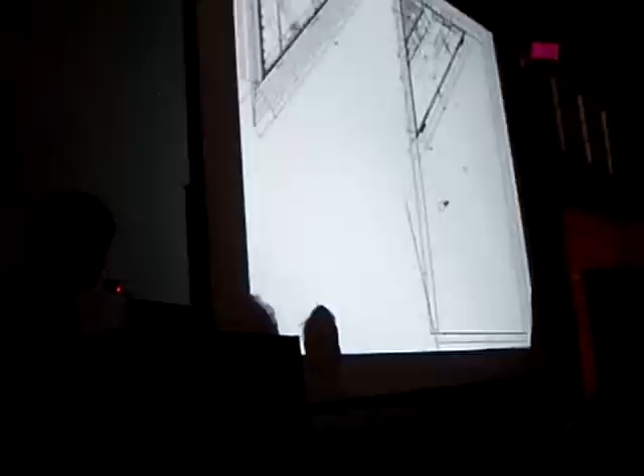So this is a plan of the pony garden. We set firstly the paddock for pony, and we borrowed this corner from pony to let people live in.

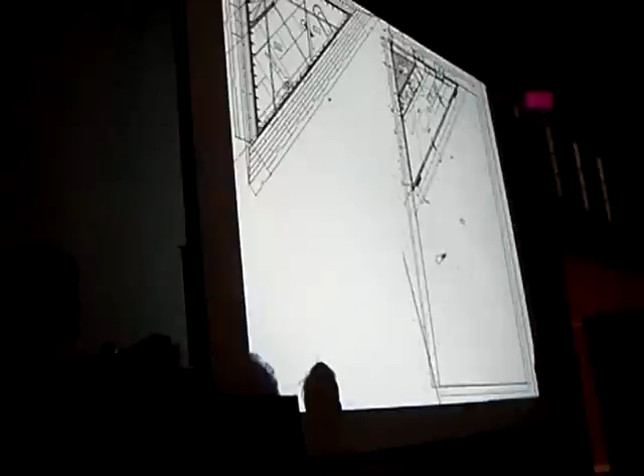And I always said to her that you can't have a glass window because it's expensive. You don't have enough money to make it. So you have only wooden shutter, and your living space is totally open to outside. And she said, yes, it's okay.

And so this ground floor level is loggia, it's exterior space. And you walk up and you go to the attic space, it is interior. So when it is extremely cold, they can escape into attic space. And then you can dine with pony, or you can feed pony from inside of the house.

So it is like this. And so the floor there is floor heating, and so you can also live in winter in this house, in this condition.

And this is a view. Oh, there are two heads. Huh?

Okay, thank you. This is the attic space. So this is a window to watch down the room for pony, where pony is living there.

Then I'd like to show one of the research projects we've done in my laboratory. It's about windows. It was published as a book titled Windowscape. It's a collection of many different types of windows from all over the world. We traveled 125 cities in 3 years with students in my school, Tokyo Tech. And we did the measurement and sketch and took photograph and made interviews to the inhabitants.

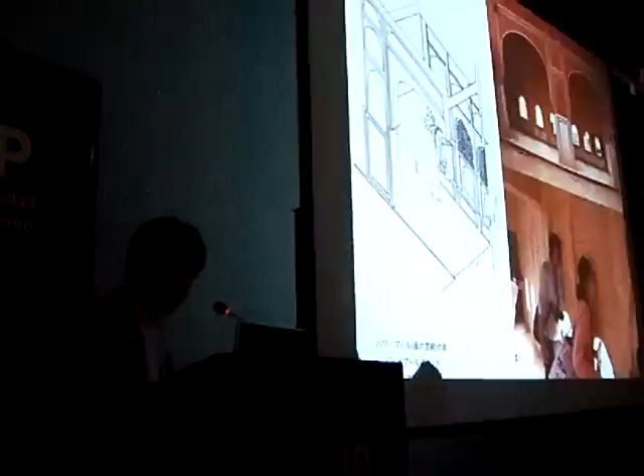Window is the most important, I think the best, it's gathering so many different types of behavior in the building. It's gather light and wind and people to behave. So if you want to see the behavior in the building, it's better to focus on window. So we did the comparative, we did the typology, and we found several concepts from these examples.

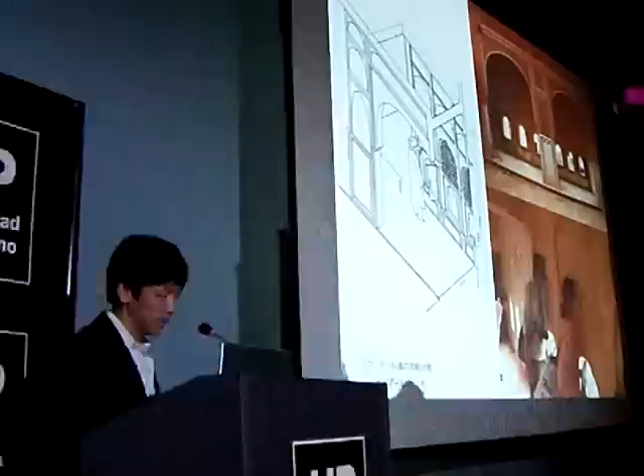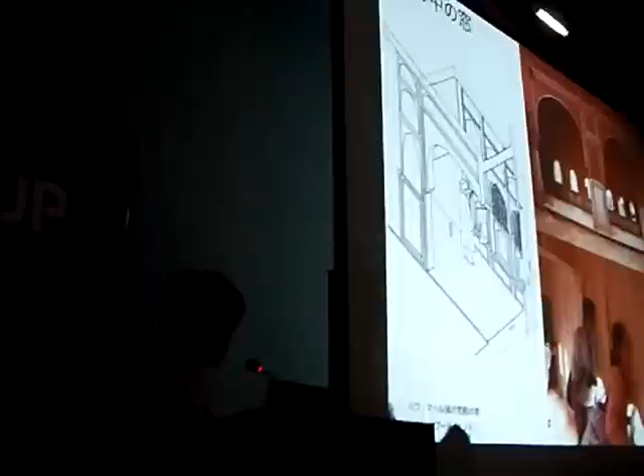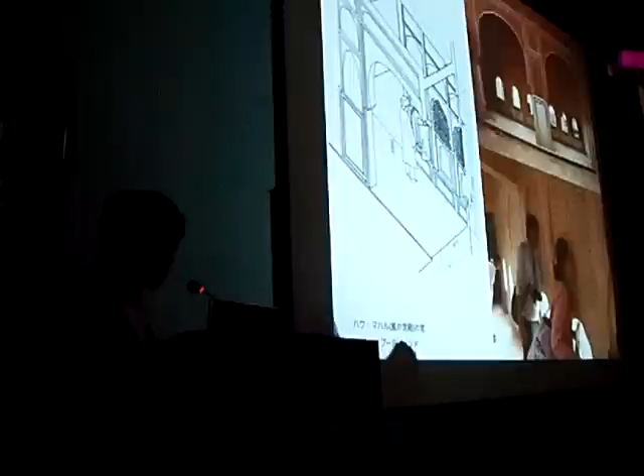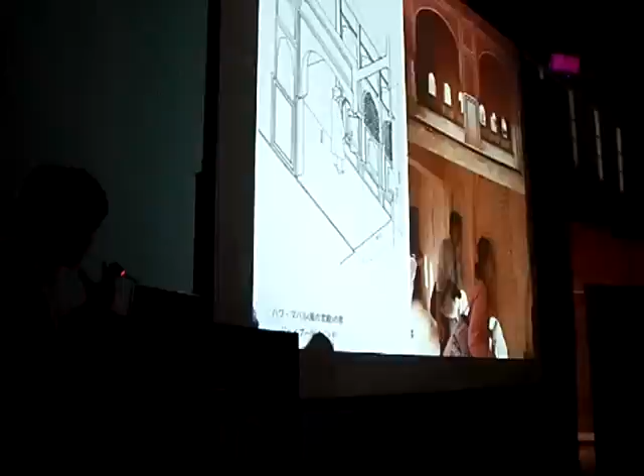This is a window from India. We call it window in the wind. So this stone filter, stone screen, carved by hand. It's 7 centimeters width. It creates a very nice breeze by itself because of its profile. So the hot air goes through this short section of the stone, and it comes through the shadow in the stone, and then it became a little bit cooler than the outside air. So it's a kind of self-generating ventilation system.

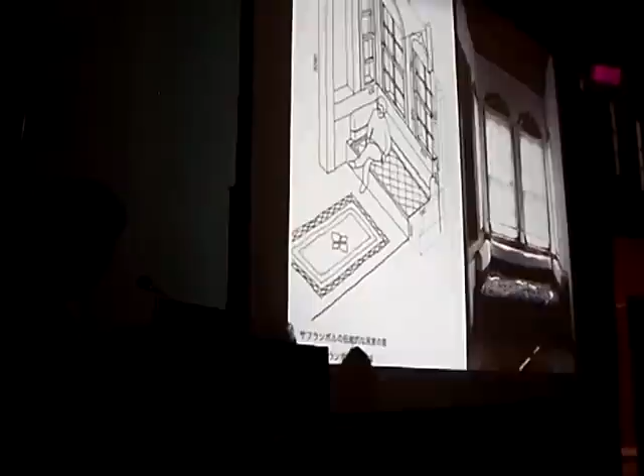And this is a seating window. It's from Turkey. In Turkey, people push out the window and install sofa and sit on it in the atmosphere of the light from the window.

This is another window which is for sitting, but also for working, in Safranbolu. You can see this type of very open window, which is part of the life of surfer. And I like this example because it totally utilizes all the space of the width of the shop by meaningful elements. So she's working on the windowsill, and it creates a kind of sitting space which bridges inside and outside.

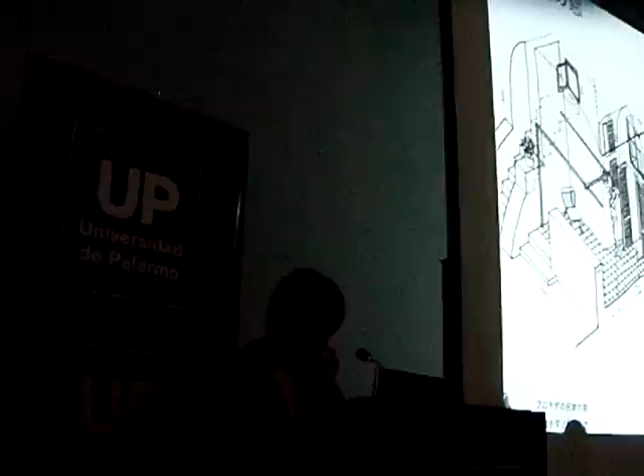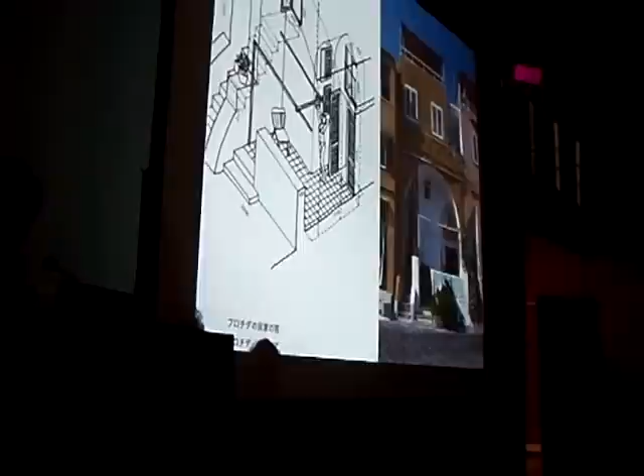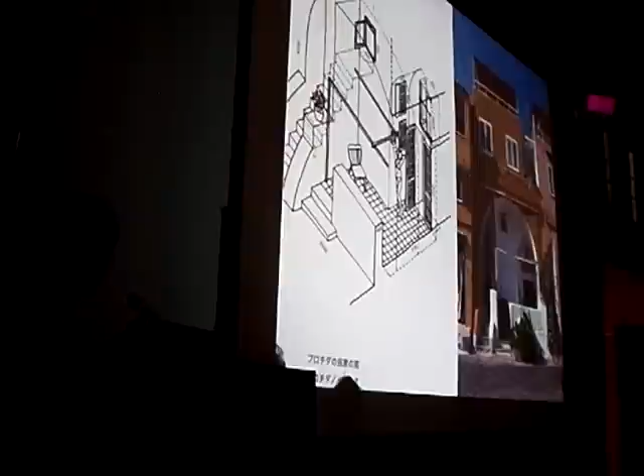This is window in the window. This is from Procida in Italy. It's a house for fishermen, and this facade is facing to the ocean. So fishermen can recognize this big opening also from the ocean on the boat. And then another type of window which fits to the life are integrated within this window. So 2 different types of windows, one for long distance to the fishermen on the ocean, and the other window, small window which fits to the life, are integrated in one facade.

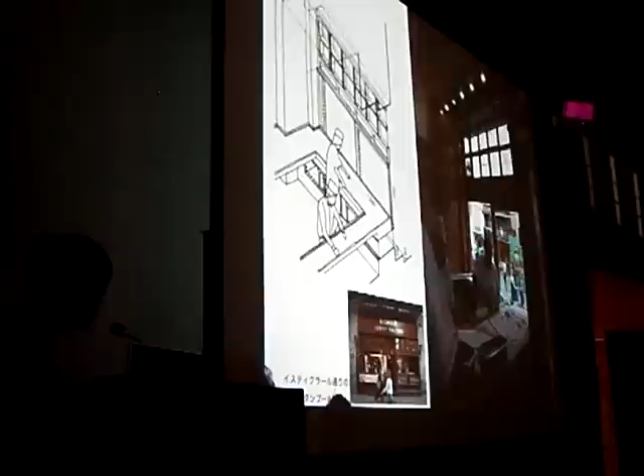This is working window from Istanbul. The window becomes working place where people can see the freshness of the products. And window also repeats itself along the street and creates a streetscape.

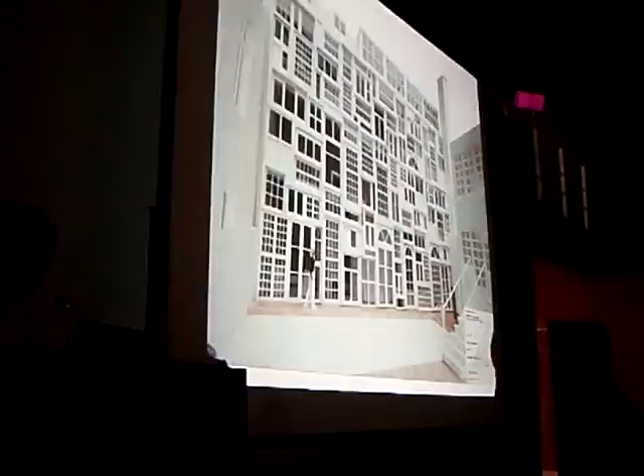And one reflection of this type of investigation is this project, a hotel in Amsterdam. Only this facade was newly designed because it is facing to the courtyard, and it's a collection of genealogy of windows in Amsterdam. So we have 4 different generations of windows in one facade to make a kind of more intimate feeling to the hotel space.

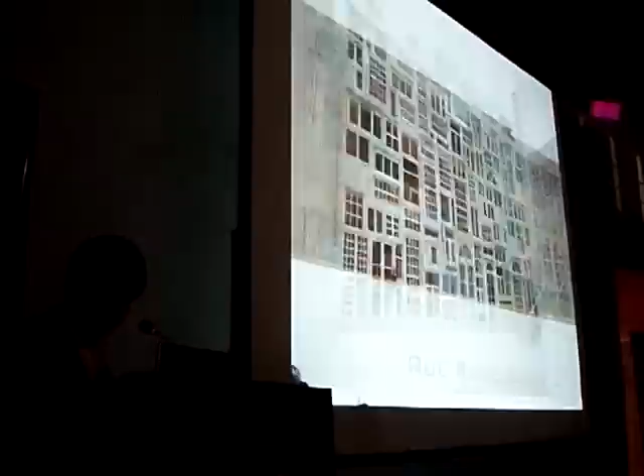And another reflection is in this project, Rebière. This is social housing in Paris, in the 17th arrondissement. I like very much the repetition of French windows in Paris because it has redundancy rather than flexibility. You can say, I'm living with this window, but you can also say, probably I'm living in these 2 windows and this big window.

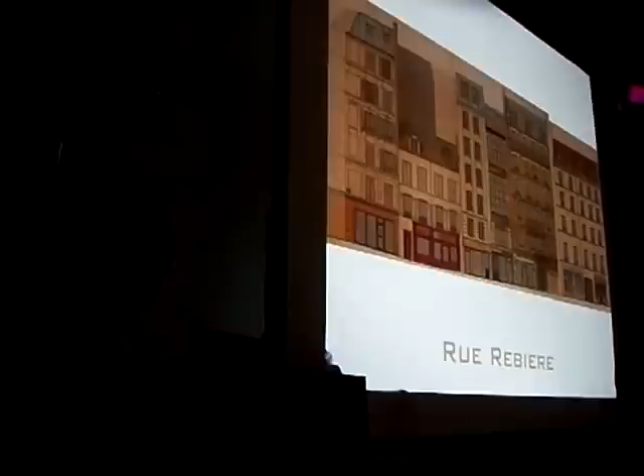Or you can say I'm occupying 4 windows, or I have 8 small windows. So the interior coordination, the spatial organization is totally detached from the repetition of the window which is on the facade.

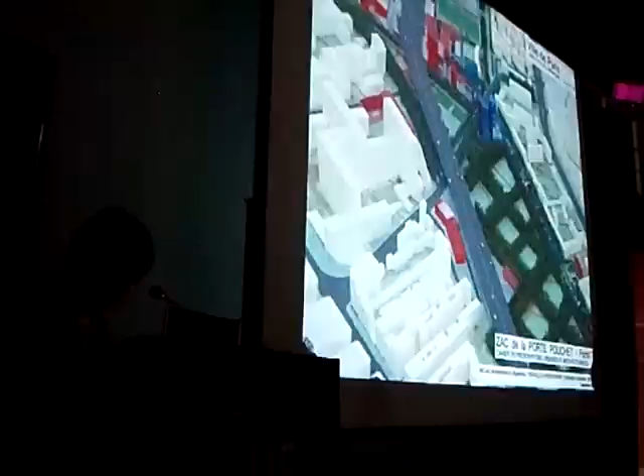And the project is happening along this cemetery, the periphery of Paris. This is Cimetière de Batignolles, and there is a 24 meters wide, 500 meters long street which was almost depopulated. There is no intersection, no cafe, no shops.

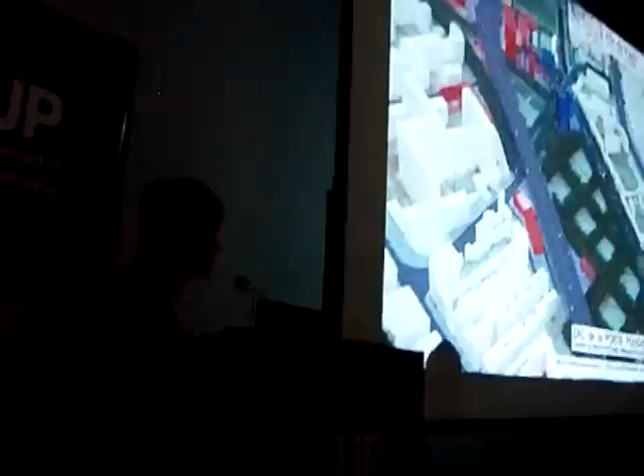And it's part of the reorganization of Porte Pouchet, which is not well known even among Parisians. So the city government wants to reorganize Porte Pouchet as a new sub-center. One of the towers, built in the 60s for social housing, is going to be demolished.

It has 140 housing units, so the government has to replace these 140 houses with new buildings. They found this long street interesting because it's too wide for no traffic. So they divided this street into two, 12 meters in depth but 500 meters long, and invited 7 architects, 5 from France, 1 from Japan and 1 from Switzerland, to design together the street of social housing. This is a view of the street next to the cemetery, with a beautiful alley of platane trees.

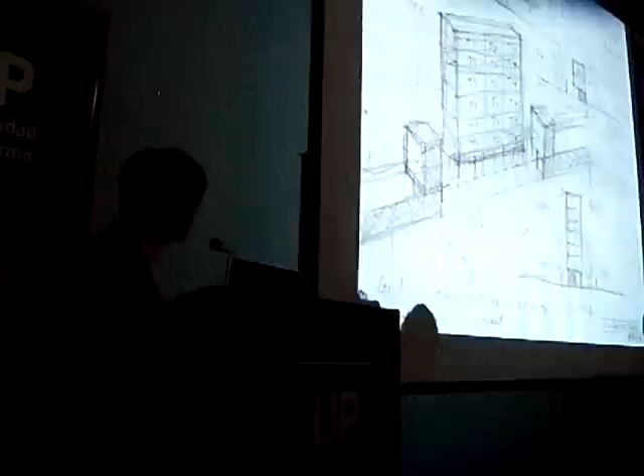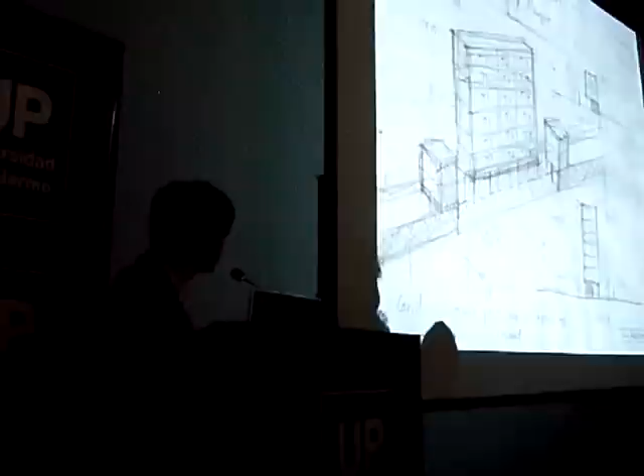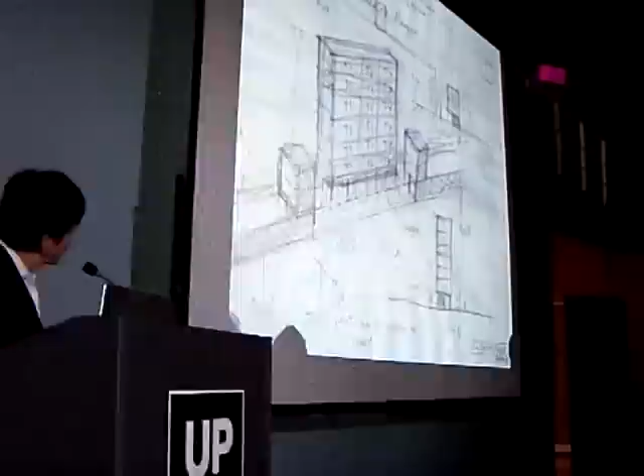Our final design is based on this sketch. We had to make 20 housing units in one property - this was the obligation, the requirement from the clients. So we made this very compact slab-like volume, setting back from the main street, creating an open space in front of it, and also creating a gap space between the next buildings.

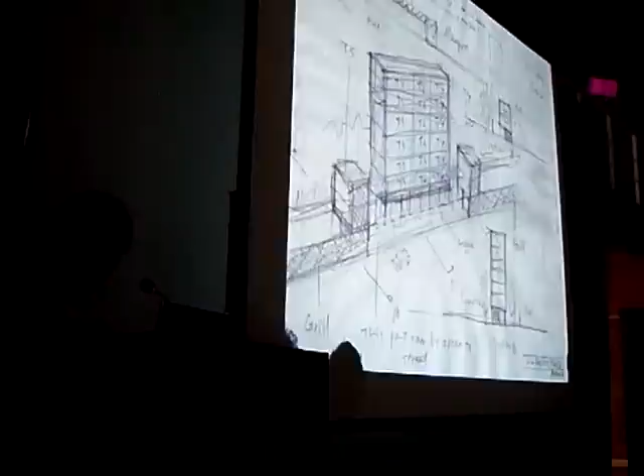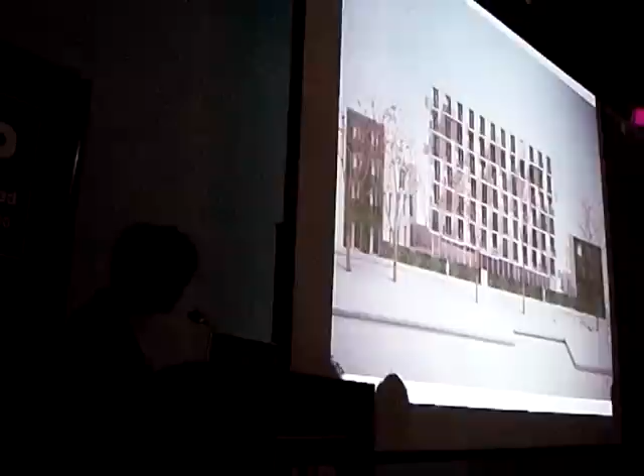And we inserted 2 small houses, almost like detached houses, into this series of social housing. This gives a variety of volume and ways of living. We found it's a very interesting strategy. This is a model - the main body of the housing is here, but we also have tiny volumes.

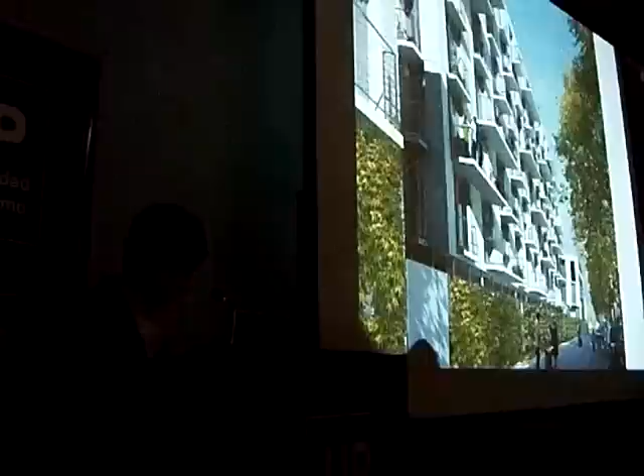We were obliged to put a fence along the street, so we tried to enlarge it on the facade of these tiny buildings to create a vertical garden. This rendering shows the repetition of the French windows and also the repetition of different sized balconies, which mystifies the unit of the family. So from outside, you can't see the family unit, which is always obvious in modern housing.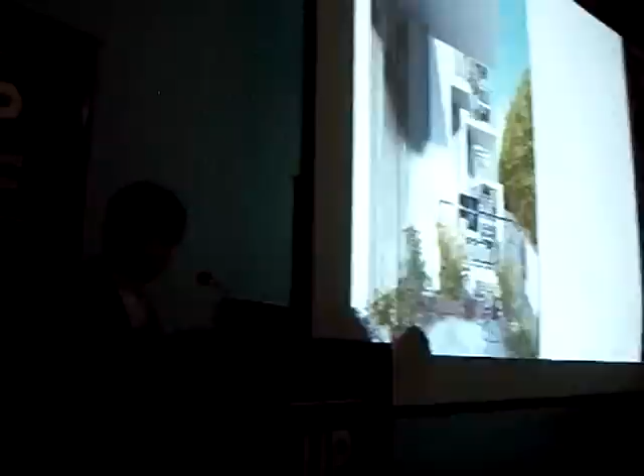So this is a view between balcony and balcony. We call it vertical neighborhood, so you can communicate with neighbors without going out from your house. And this is the result - it's built like this. We don't have green on the fence at this moment.

This is a very simple repetition of French windows. There are 108 windows for 18 houses, and you don't know how many windows one family owns from outside. We also have this type of loggia space on the ground level for the community, facing the open space for children's playground.

This is some detail of the balcony. This is the backside facade from the cemetery. It was difficult to make big openings to the facade because of the restrictions about windows in France, so this is called the loggia.

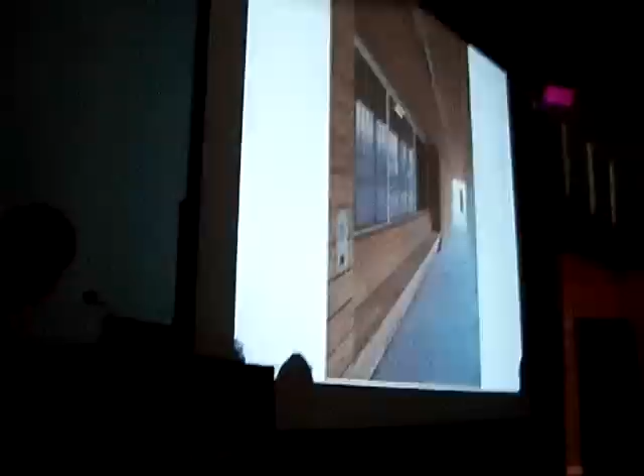We insisted on having a bench next to the entrance in this loggia space. We fought with the clients, but finally we won. We got it.

So the interior is very Haussmannian - simple rooms with repetition of French windows. This is one of the corners, you can see Sacré-Cœur. This is one tiny one, but with 5 windows. And here's another corner.

This is the relationship between the living room and kitchen. The interior space is very much standardized, so we concentrated on making very nice rooms, like nice bread. This is the vertical neighborhood - you see different types of balconies from different windows, so you can communicate with neighbors.

I'd like to go on to show some projects on a smaller scale, more about public space. And this is...

White Limousine Yatai, realized in the framework of an art exhibition. We were asked to connect different art venues in this big art triennial happening in the landscape of the whole region. We proposed this yatai, which is a food store in Japan. This is the normal size of the yatai, a food store in Tokyo.

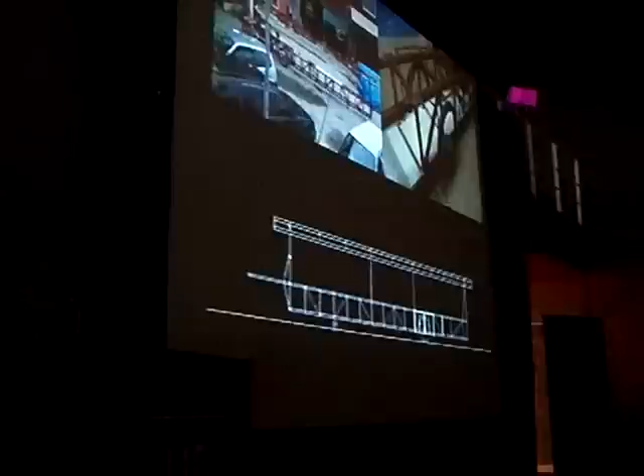Like a limousine car. So this is a model, and we made this building with steel beam, truss beam with wheels. There is no motor, so you have to push. And since it's 10 meters long, it always produces a traffic jam.

It's very troublesome, but people start laughing when they recognize it as a stretched food store. And we visited different venues and participated in local festivals like this. This is one of the things we participated in, a local festival, and people know how to behave in this type of space.

So they are joking with the students who worked with us, but we serve only white meals and transparent green meals, which reminds of the very heavy snow in this area. So at night, many people gather to start singing, and we are always criticized by neighbors.

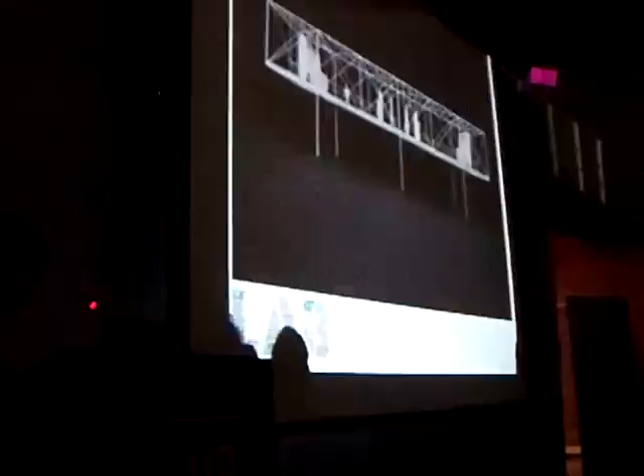We call this type of work micro public space. By introducing this type of furniture or mobile structure, we stimulate the public space, the sense and practice of public space, which is incorporated in every human being. So we call this micro public space, or public space without an enclosure.

It is not the space which is defined by enclosure, but which is defined by the collectivity of collective behaviors among people. And we developed this type of work, dozens of projects in different places in the world.

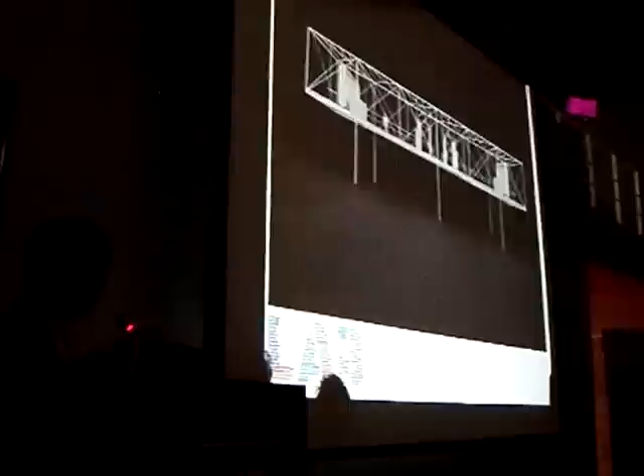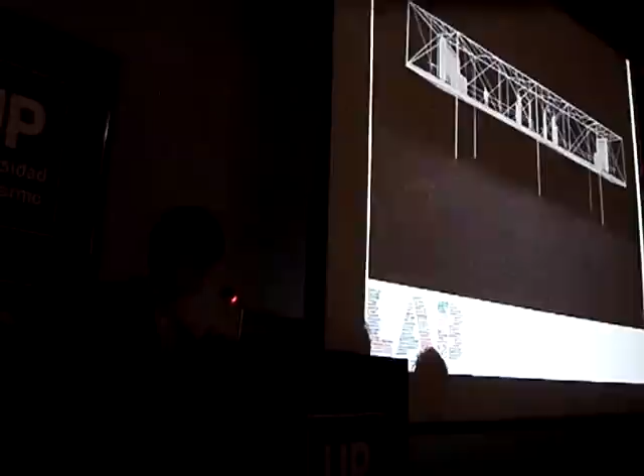And then recently we had another opportunity to design the BMW Guggenheim Lab in New York, which is a development of our idea of micro public space. Micro public space is totally dependent on time, so it's a time-based performance space.

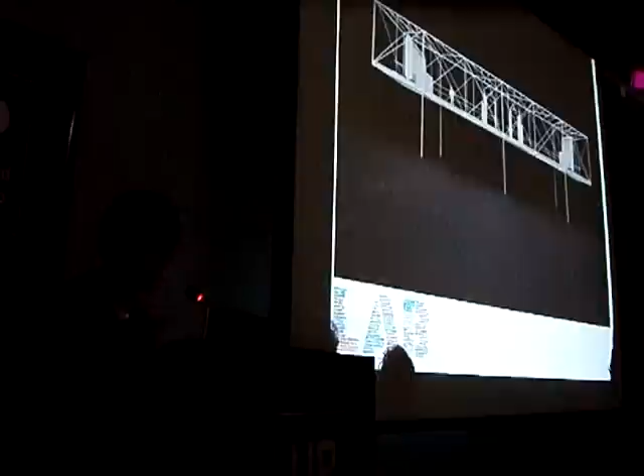And in this project we also developed this idea by introducing this type of structure in the city. So we always imagine the city loggia, which is very typical in Mediterranean countries, and which is very generous for people, and there's no fixed function.

You can do a wedding, you can do a juridic meeting, you can just come alone to enjoy the landscape from the window. So this is totally open space for the community. We like to introduce this type of space in the framework of today's city, used in the framework of the BMW Guggenheim Lab.

BMW Guggenheim Lab is a kind of traveling urban think tank which thinks about urban issues in different cities. Now it's traveling to Berlin, and after Berlin it goes to Mumbai. So the structure is a traveling structure, so it must be collapsible and easily buildable.

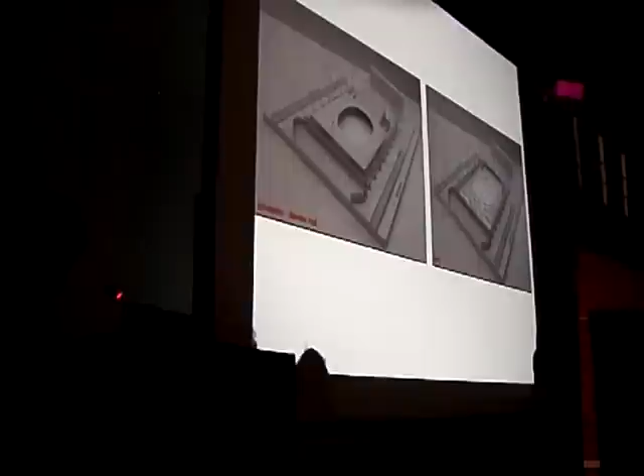But we couldn't find it, so this is an initial scheme which we proposed, imagining the loggia in the city with a big courtyard, but actually we couldn't find the appropriate venue which fits the idea of the curators. Finally we found this site, which is in between buildings, a kind of leftover space in the city, but this site was interesting because it connects two streets.

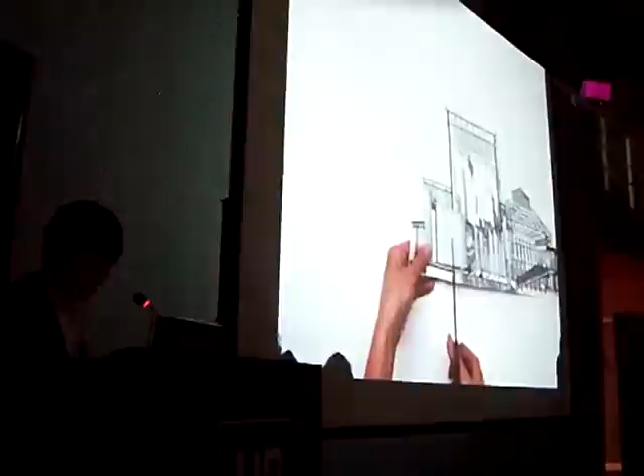One is Houston Street, which is here, and another is First Street, this side. And they have a community garden behind these buildings. So it could be a new proposal also for the renovation of this community garden. So we worked together with local people.

But in order to put all the supposed activity in this space, which is 1/3 of the expected surface, it has only 170. So in order to do that, we proposed to the curators to think about theater rather than an art exhibition space. So we proposed they think about this urban lab, Guggenheim Lab, as a 10-week long lasting theater play.

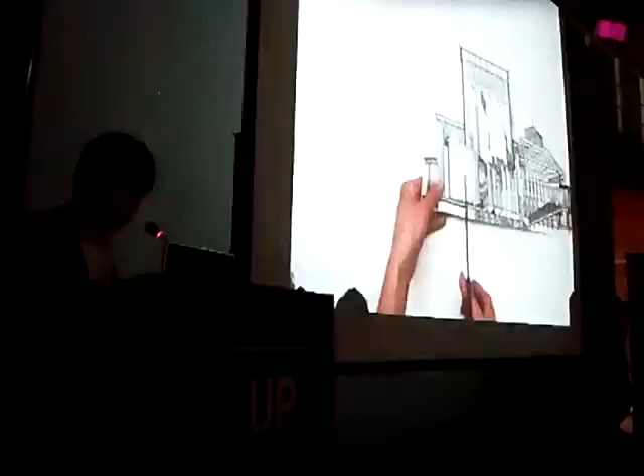And they are happy with this idea, and we proposed this traveling fly loft in different cities. So we cut out the stage and insert it into the vacant space in the city. So it's only the fly loft, which is the space above the stage.

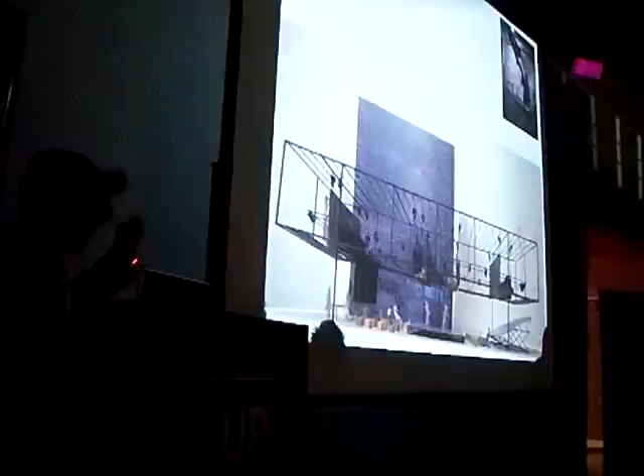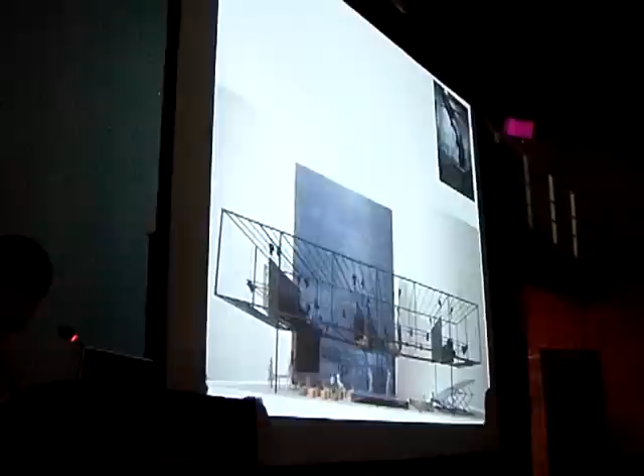Which has housed so many instruments like lighting and screens and beamers, projectors, and audio systems, and storage of furniture and big stage steps. And we made this structure with CFRP, carbon fiber reinforced plastic, which is extremely light and strong. It's 1/6 of the weight with the same performance as steel.

So the program became totally up to the time schedule. Curators started to make a time schedule to change the ground level by bringing many different types of instruments down from the upper level and transforming the stage on the ground level. This is the program they made, following the timeline. It gives a very strong structure for programming also.

And this is a night view of the Guggenheim Lab, which is inserted in between buildings. So the ground level is totally vacant, with many instruments above, and you can pass through. It's totally free, admission free.

You can jump into the discussion during the workshop, talking about comfort. They are talking about confronting comfort. This is a theme, so this is a view from a different mode.

One is a workshop with tables and chairs, and another is a game produced by invited thinkers in New York for this workshop, for this Guggenheim Lab. This is the scene of a lecture with many chairs and a film viewing position, and a game.

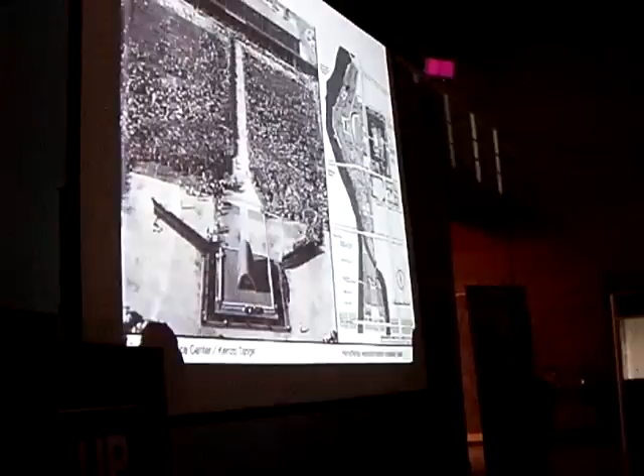And this framework was established. This work was brought by Nike Japan, and they tried to renovate this park, which was built in 1964, in collaboration with the local municipality, so it's a collaboration between private and public.

It's a donation project, but in the framework of naming rights. So Nike Japan gets the naming rights and invests money to renovate the park. It's a very new framework for making public space.

I was very interested in this project because in the 20th century we didn't have this type of example. We had several nice, very important public spaces realized by the design of architects. The first one is the Peace Center in Hiroshima, built in the framework of public initiative with public money.

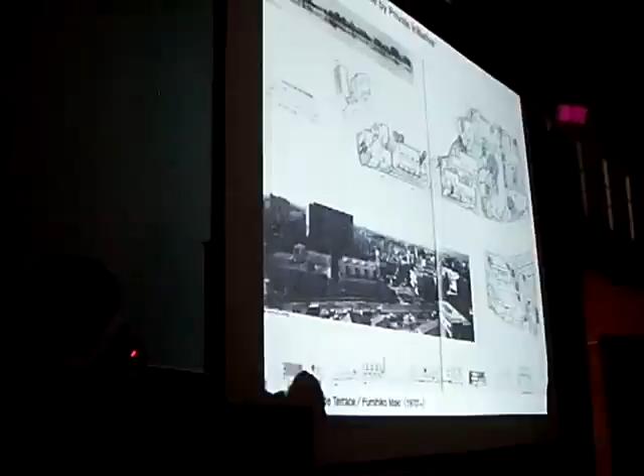And another one is Daikanyama Hillside Terrace, designed by Maki. It's private money and private initiative. But Maki constantly designs a series of buildings along the street, and the typology is always open at the ground level for the public, by inserting small shops and having rental apartments on the upper floor.

So the Miyashita Park could be a collaboration between private money, public authority, and local authority. And this is the condition of Miyashita Park before the project.

It had too much grown vegetation. It's dark, you can't see from outside, so it was not a real place for the public. And some parts of the park were inhabited by homeless people.

It took so long, almost 2 years, to find a balancing point between two parties. One is the local municipality and another is the global enterprise, Nike Japan. They have very different characteristics and their intentions are very different, so it was very hard to find the meeting point between them.

In these 1-2 years, before fixing everything, some information leaked to the people who were against this park, and then we had several protestations by people. One was organized by the NPO who support homeless people, and another was a protestation from a group of young artists, who said to keep the right for public space.

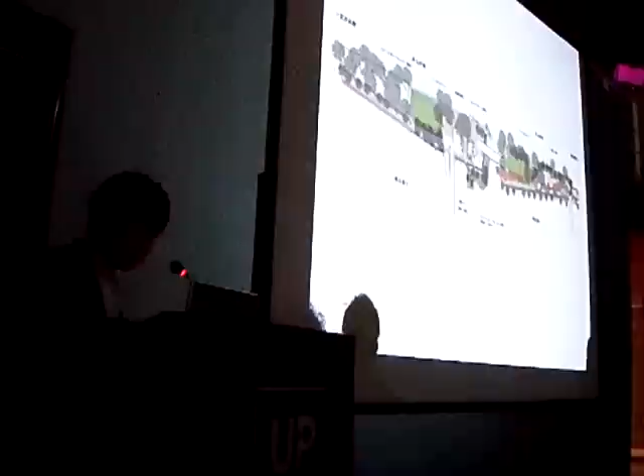But anyway, we solved these problems - not problems, but issues to deal with. The local government dealt with these protestations by people, and then finally we executed this project.

The park is built on the rooftop of the garage, built in '64 at the time of the Olympic Games in Tokyo. And now the trees originally planted on the park, on the rooftop, have grown 20 meters high. It's a very big tree today.

It's a very rare green area inside such a commercial district. So we kept all the green in the park, and we also extended the park area on the structure, 1.5 meters on both sides.

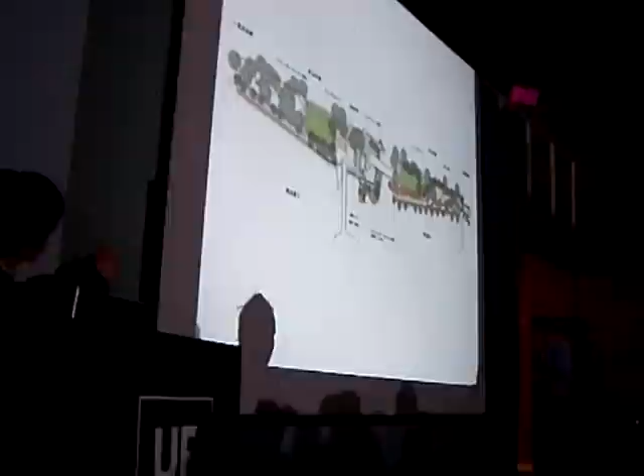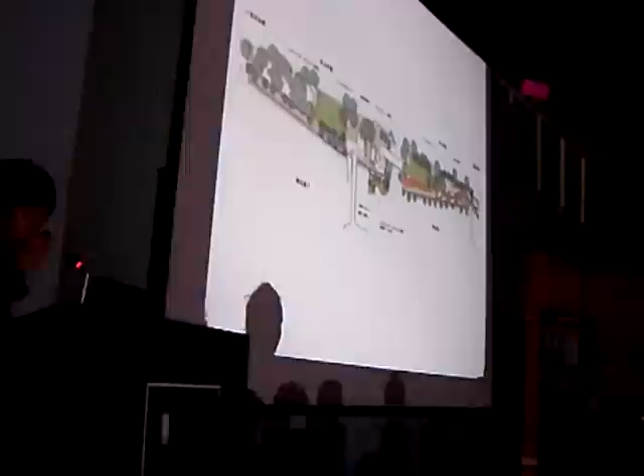We kept this futsal court, and we newly built a skateboard park and climbing wall. We renovated the changing room and toilet by landscaping. So this is a maquette, models.

Actually, this park was one of the examples in Made in Tokyo, which was published in 2001. It's a collection of interesting hybrid buildings in Tokyo. And this is a view of the park today.

So everything is built keeping these big trees. This is the intersection part. We inserted this new staircase to bring people from the crossing to the central part of the park.

And this is a new facade of the changing room with this black glass wall.

Today, many young people exercise dancing. This is a climbing wall. This is a skateboard park. Skateboard park, all the shapes are defined by...

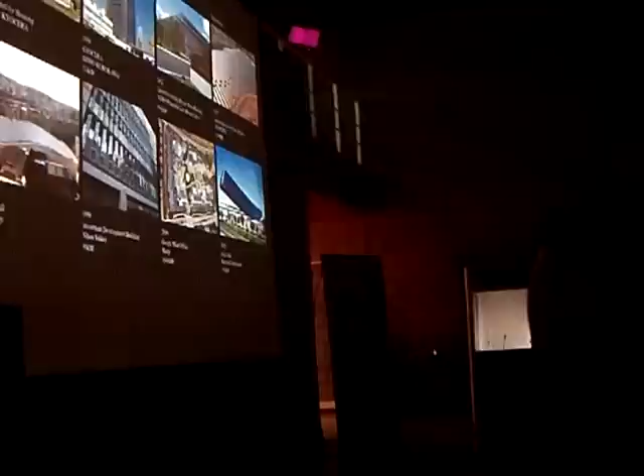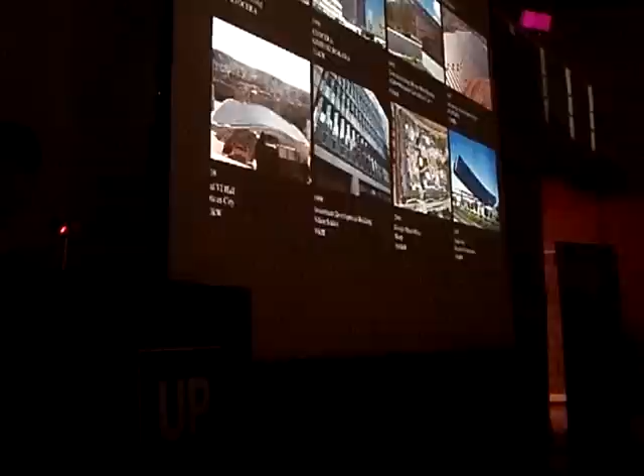So it's built along the railway track, and we did a very simple investigation of a building which has solar panels, photovoltaic panels, most of them utilizing leftover space like a roof or wall as a possible place to install a photovoltaic panel, solar panel. Some architects who want to integrate solar panels design new building elements for power generation.

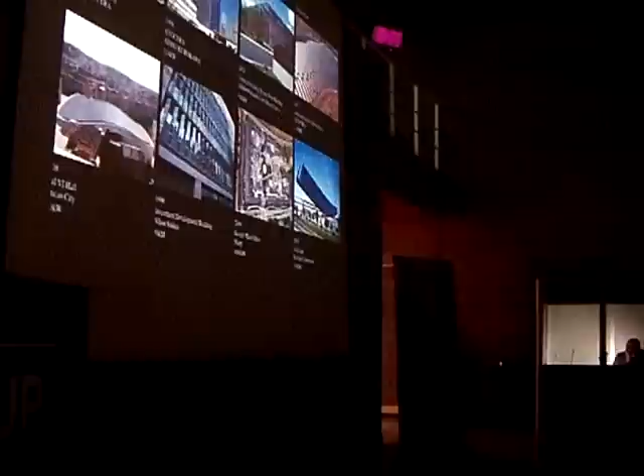But I think this is not good, because this type of technology advances so fast. So in 5 years we'd need to replace the solar panel with a new one that's more effective. So we decided to design the whole building with standard solar panels, which are available in the market.

The building needs this kind of heavy-duty experimental laboratory, so we also had to think about the structure. It's also part of the new energy grid on our campus, so it shouldn't be damaged by an earthquake. This is a requirement from the school.

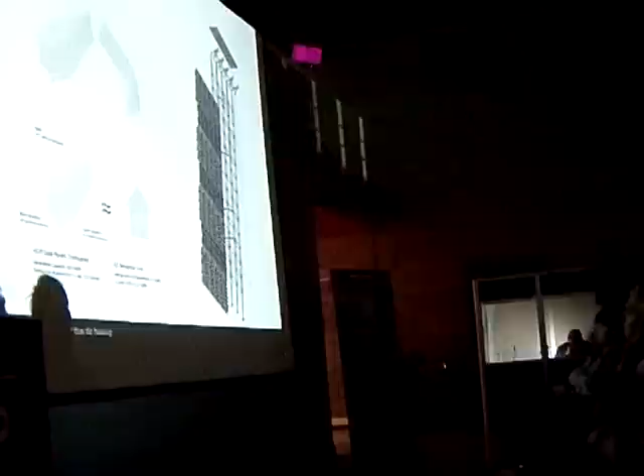This is a very important mission of this building. So, yes, okay, I have to go.

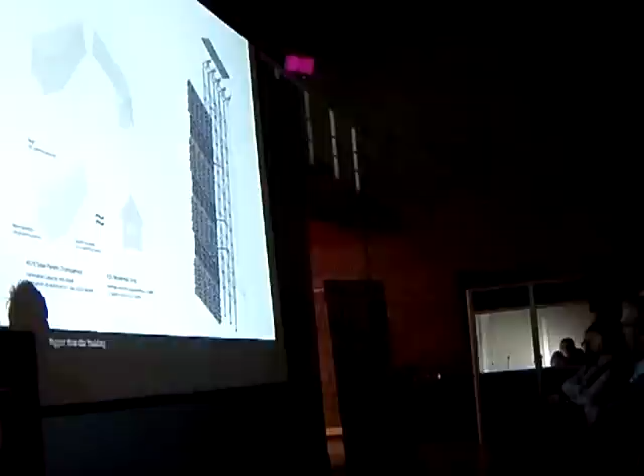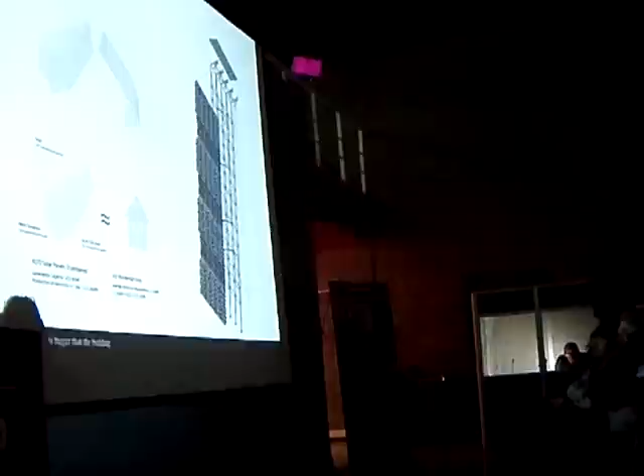So we invented and designed this envelope, which is made of solar panels as an independent element of the building, the main element of the building. Previous examples which utilized solar panels gave priority to the building and second priority to the solar panel.

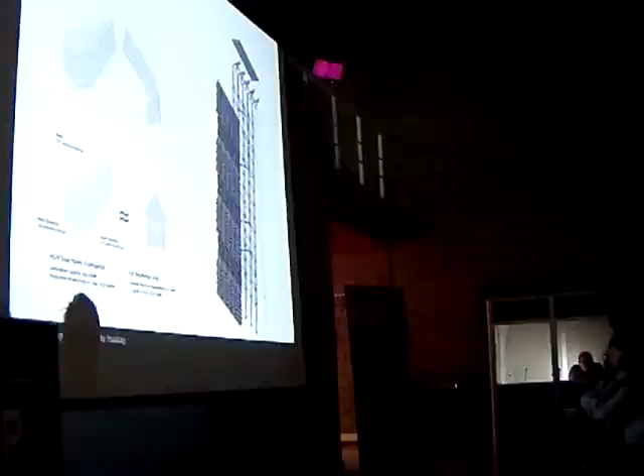In this building, the solar panel has first priority in its appearance, and the building itself, its height, is hidden behind this envelope. It also reminds me of rural installations used to dry rice, which we call inagake, because they share the principle of being dried out under the sunshine.

So we found that the solar panel should also be treated as a kind of agricultural product. We also produced this space between the solar panel envelope and the main building, a vertical space 30 meters high and 100 meters long, which reminded me of the experience of a Gothic church. So we call this space the solar cathedral.

The section has two different types of activities: one is a laboratory and the other is study space, so they sandwich each other. For study space, we need more light from outside, so this envelope behaves in a way to bring light into the space.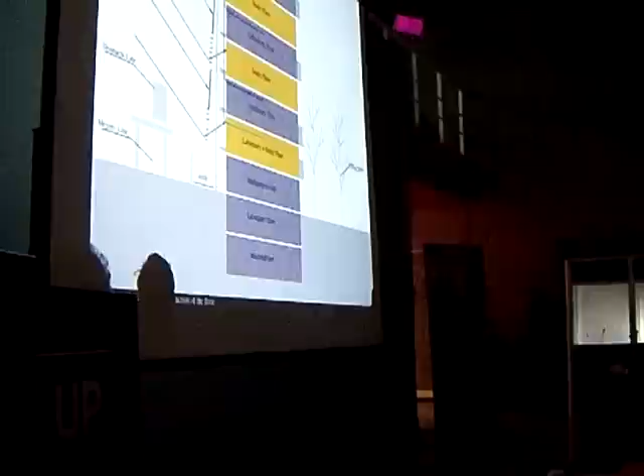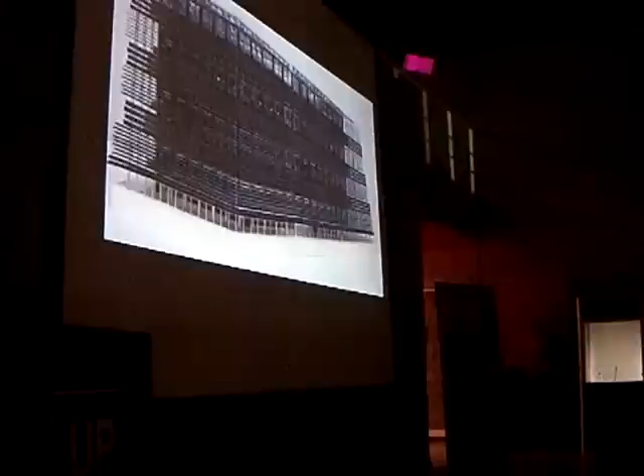But for the laboratory space, it's shut down to get more sunlight on the solar panel. This is a model, so the building is smaller than the solar panel envelope. Another view: the backside is dominated by a grid, which has a balcony for service, so you can put any laboratory experimental instruments on this balcony.

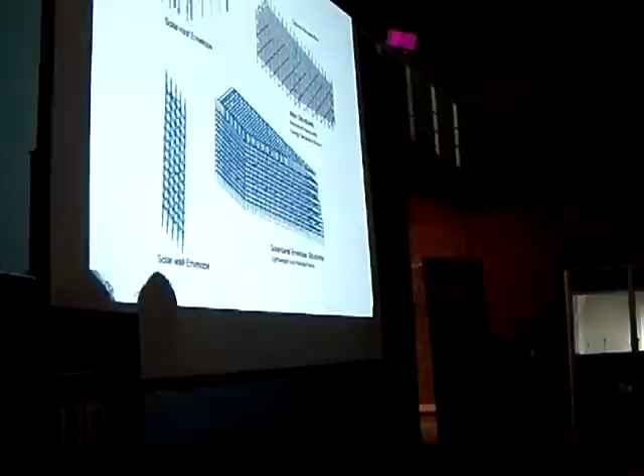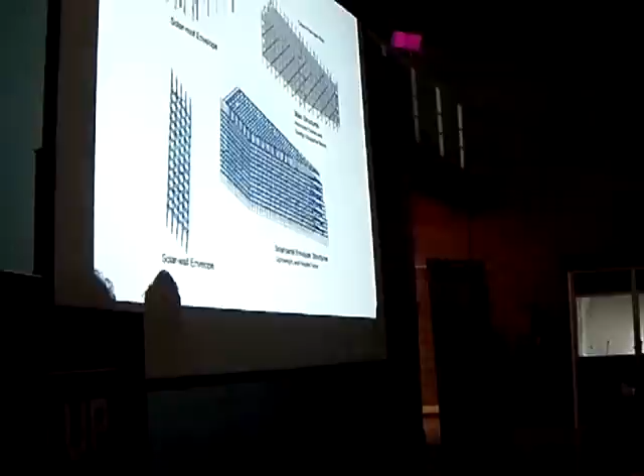This bracing system is quite unique because it reacts to the earthquake - it's called an unbonded brace. It reacts to the earthquake, and before giving a big impact on the main structure, it collapses and releases the power of seismic energy.

But it's also important to think about the landscape made by solar panels. This is because it's very black and strong - a very industrial material. So how to deal with this industrial material is also a very important issue for architectural design.